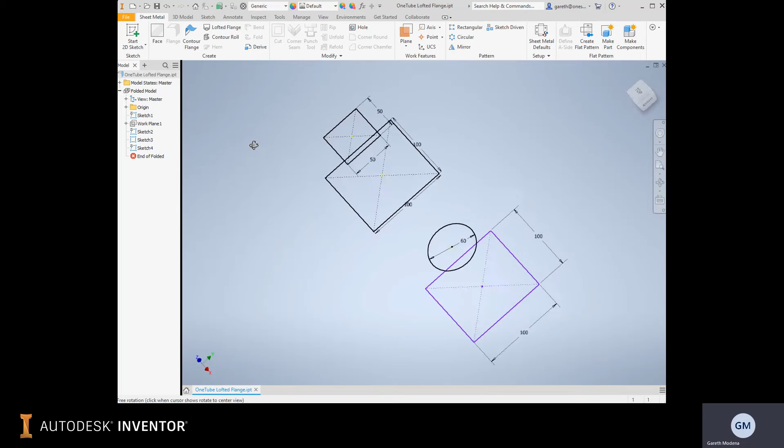In this case, we're going to take a look at the sheet metal tool called Lofted Flange. It can be used for things like square to square, rectangular to square, or square to round scenarios. So the sketch setup is essentially two profiles away from each other.

This is a work plane that's 100 units away from the other one. The Lofted Flange works by just selecting those two profiles. So I'm going to go Lofted Flange between profile 1 and profile 2.

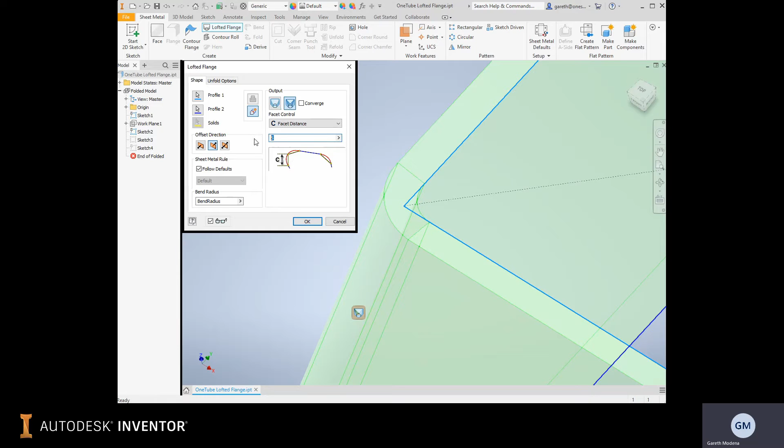It then has a couple of settings for things like the chord size or tolerance. We can also set the specific distance across. So we'll say we want a 2mm distance, so it's 1, 2, 3 segments, 2 millimeters across the outside.

It also tries to follow the profile as best it can in order to unfold it, so it can unfold these as well. We can also set it to be on the inside or outside of the profile, or half in and half out, which is the thickness of the sheet metal defaults you would be using.

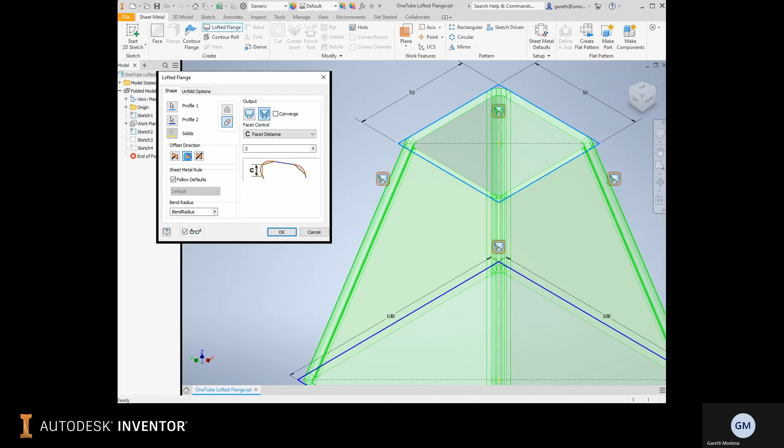I'm going to represent it on the inside, so this is the outside total size. We'll say OK to that.

Alternatively, we can use it on the other sketch. So let's go and turn that one on.

Let's turn this body off. We'll create a new body. So we'll activate the Lofted Flange tool, select our profile 1, profile 2, and we want to create a new body.

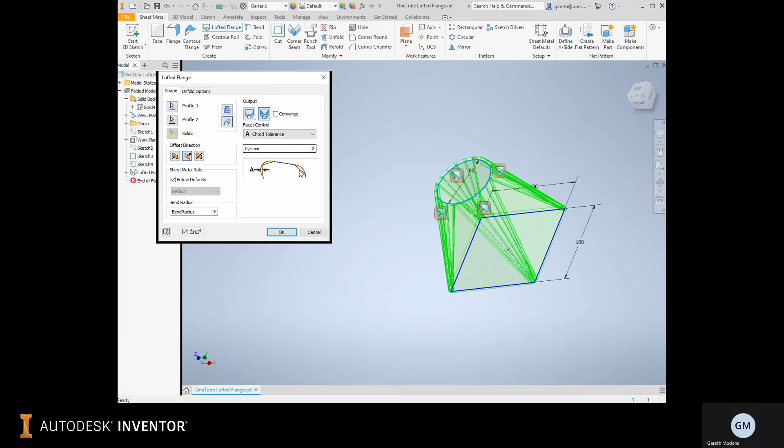And we want a distance of, say - the smaller the segments, the more edges it adds. We'll go for about a 20, so that's a 20 length on each one of those segments.

A nice little tool for being able to unfold and create sheet metal items. If you want to check out more of our series, go ahead. And that's the Lofted Flange tool.